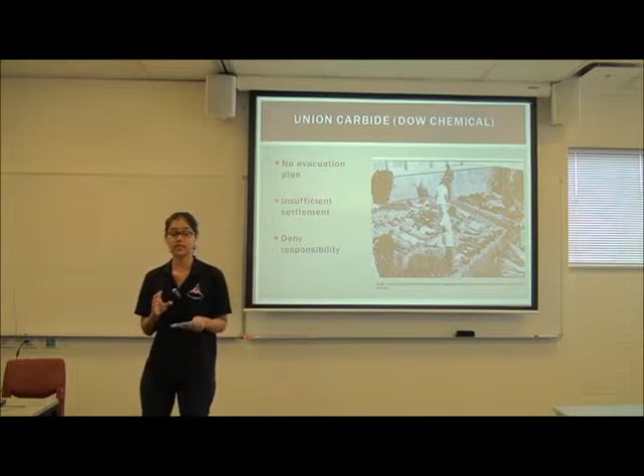No evacuation plan was prepared, and a siren used to alert the public around the factory of a chemical release only sounded for a few minutes. Most residents around the factory didn't even wake up to the siren, but instead to irritation caused by the gas. Now, Union Carbide, who owned the factory from which the toxic chemicals were released, and the company's owner, Dow Chemical, refused to clean up the factory and continue to deny responsibility for the poisoning.

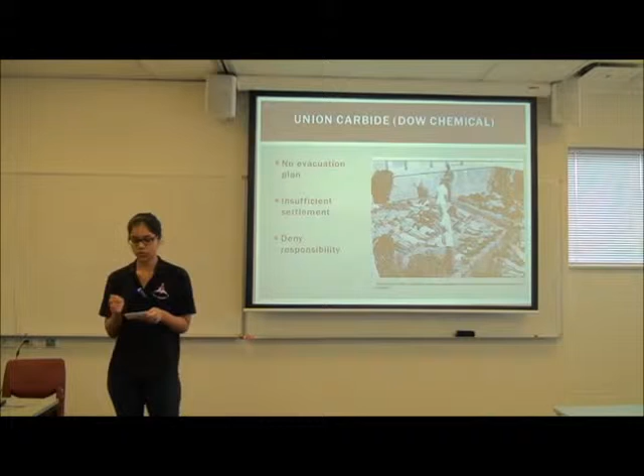Greenpeace and survivors of the accident are calling on Dow Chemical to clean up the factory site, to secure long-term medical treatment and rehabilitation for the survivors of the accident, to ensure compensation for the affected people and their families, and to provide clean drinking water to communities in areas affected by contaminated groundwater.

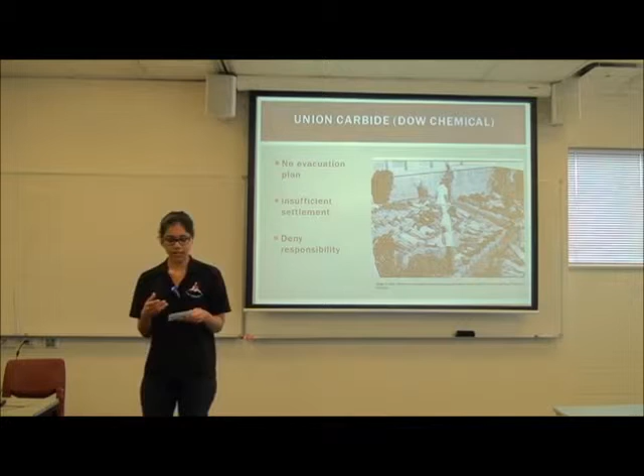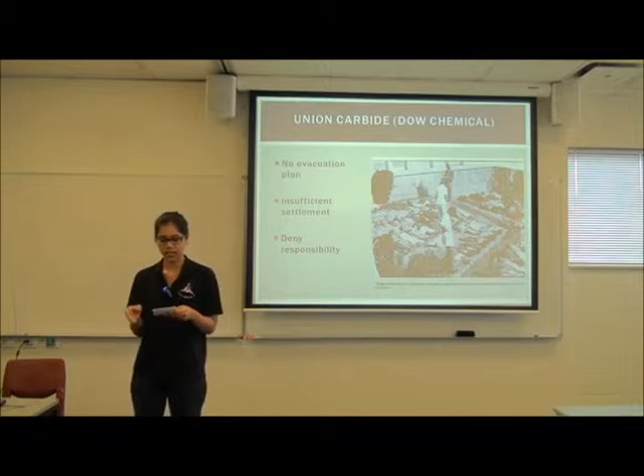Now that you have an understanding of what happened during this disaster in Bhopal, Torrin will explain how the chemical plant operated, Darren will describe what actions and events led to this horrific disaster, and Shalini will explain the technical improvements and lessons that were learned by the chemical industry as a result of the Bhopal disaster.

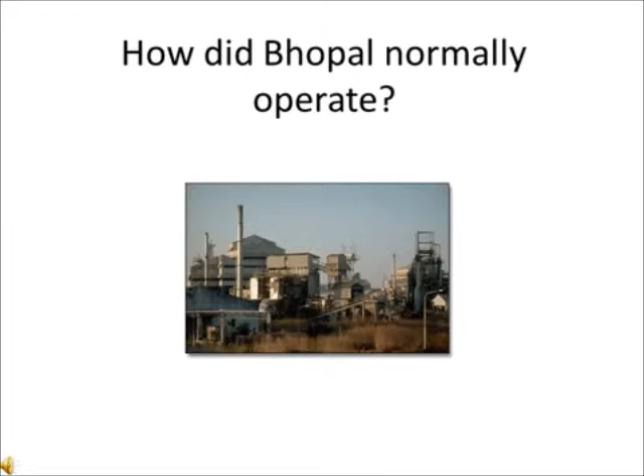The disaster at the Bhopal plant occurred because operation of the plant differed from the procedures and maintenance requirements the plant was designed for. I will briefly explain the main processes undertaken at the Bhopal plant, focusing on the methyl isocyanate storage facility, the origin of the disaster. The Union Carbide India Limited owned Bhopal plant produced the pesticide carbaryl under the trade name Sevin in Bhopal, India from 1979 until a disaster occurred in December 1984.

The plant was located approximately 2 kilometers to the north of the center of Bhopal, set amidst densely populated slums which lacked adequate emergency and technological support. Logistically, the plant's location was chosen because of its close proximity to a reliable source of water at local Bhojtal, to take advantage of the railway that would span the country, and because of its central location in India.

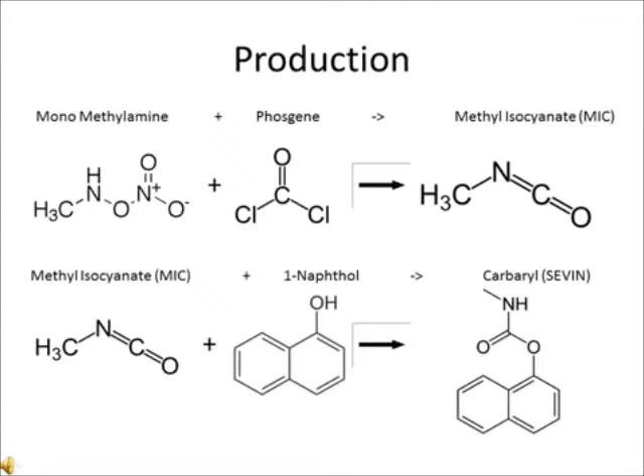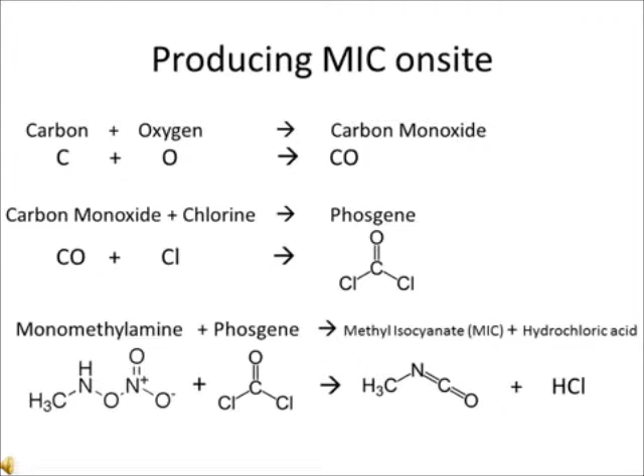Under normal operating conditions, the UCIL factory produced carbaryl by reacting monomethylamine with phosgene to produce methyl isocyanate. MIC was then reacted with alpha-naphthol to produce carbaryl. In one section of the plant, carbon and oxygen were reacted to form carbon monoxide, which was then reacted with chlorine to form phosgene. Methylamine and phosgene were then reacted in a separate part of the plant, producing unrefined MIC and hydrochloric acid as a byproduct. Once refined, the MIC entered the storage system in which the disaster occurred.

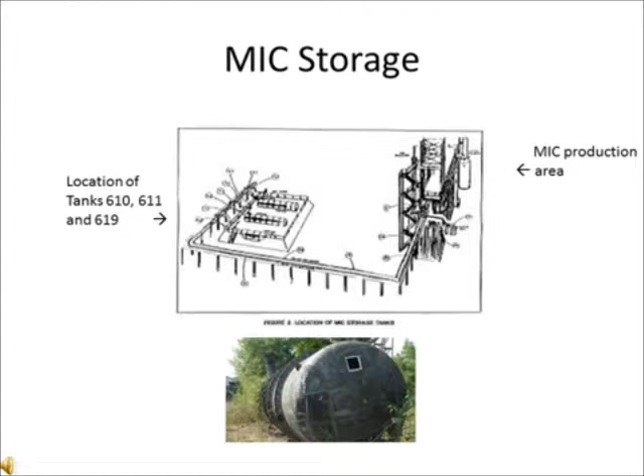The intermediate MIC was stored in 2 double-walled, partly buried stainless steel tanks, storage tanks 610 and 611. An additional storage tank, 619, was also available to receive contaminated material in case of an emergency, such as a thermal runaway reaction. These tanks were designed for an operating pressure of 4 bar and had a capacity of 55 cubic meters each.

The MIC stored in the tanks was transferred via a centrifugal pump around a loop through a fluorocarbon-based refrigeration system to keep the stored MIC near 0 degrees until it was required in the alpha-naphthol reacting vessel. MIC was introduced into this loop from the MIC refining still or from the 2 other storage tanks.

Should an overpressurization in the tank occur, a combination of a rupture disc and safety valve on the top of the tank ran to the relief valve vent header, where the gas could be discharged into the atmosphere via the vent gas scrubber and/or flare tower, described by Darren in the next section.

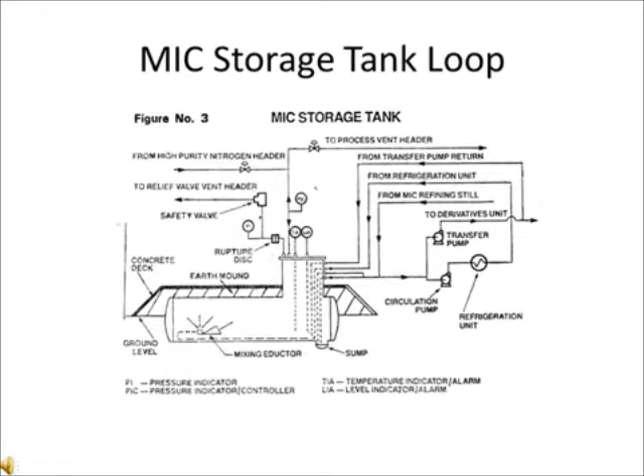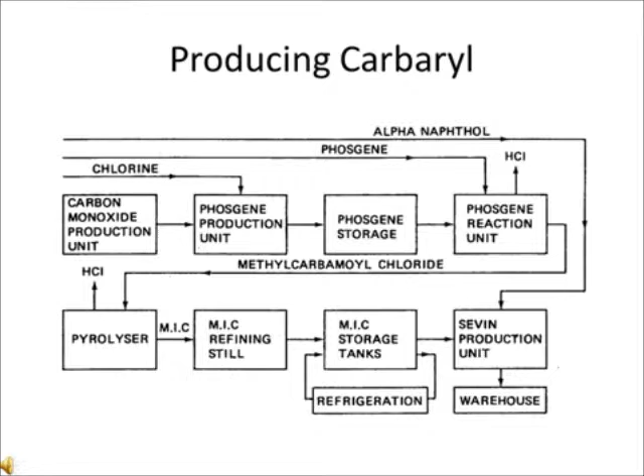Stored refined MIC was transferred to the derivatives plant when required by means of a different centrifugal pump, where it was batch reacted with alpha-naphthol to form carbaryl, ready to be packaged and dispatched.

Under normal circumstances, water was not placed in the same closed system as the stored MIC, as they react exothermically. However, due to a variety of reasons that Darren will go into next, water was introduced on the night of the disaster and culminated in a runaway exothermic reaction that could not be safely neutralized or contained.

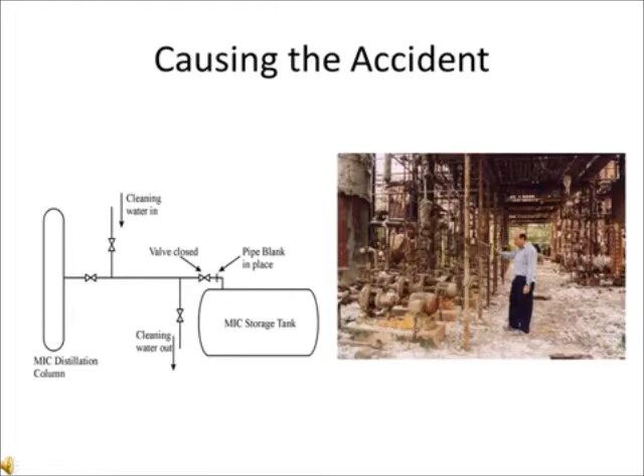Now that we've seen the consequences of what happened and how the plant operated on a daily basis, let's discuss what went wrong. Well, the list of what went wrong at Bhopal is quite long, but the basic scientific explanation is that somehow water entered a tank containing methyl isocyanate, MIC.

The water and the methyl isocyanate reacted exothermically, causing an increase in temperature and pressure. This increase was so great that the methyl isocyanate expanded into a gas form, blew past all the safety systems and was vented into the atmosphere.

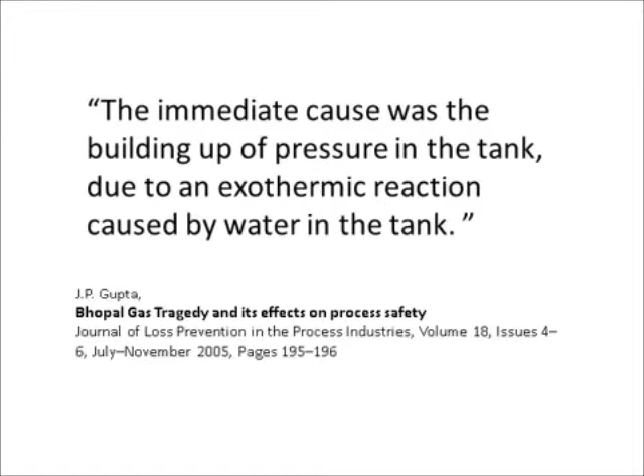There have been 3 major investigations into the incident at Bhopal. The Indian government conducted its own investigation through its Central Bureau of Investigations. This report has never been released to the public. Union Carbide conducted its own investigations, and an independent investigation was conducted by an engineering consulting firm, Arthur D.

Little. All 3 reports agree that the cause of the incident was water entering MIC storage tank 610. However, the reports disagree on how much water entered the tank and how the water entered the tank. The Union Carbide report and the Arthur D. Little investigation suggest that the only way enough water could have entered the tank would have been for it to be deliberately poured in by a disgruntled employee.

The Indian government report has never been publicly released. However, the Indian government has supported the theory that the water entered the tank when a section of pipeline was being washed. The initial investigations were hindered by the fact that large amounts of toxic chemicals remained in tanks and had to be neutralised before the investigations could take place.

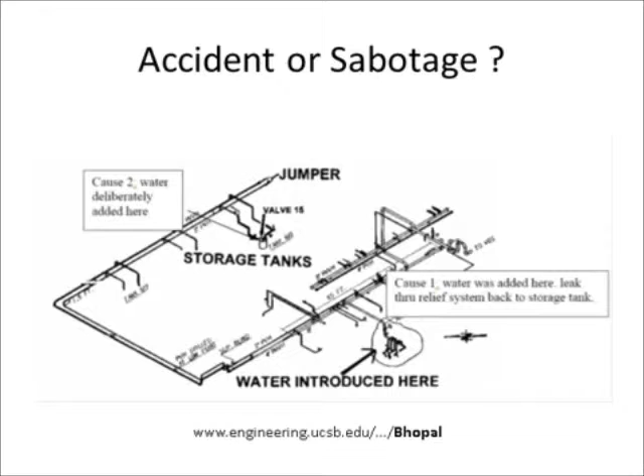However the water came to be in the tanks, the fact remains that the plant was poorly designed and located in the first instance. The plant design was compromised from the beginning, with the local government authorities insisting that the latest technology electronic warning systems be replaced by analogue gauges so that more employees would be required at the plant, thus providing more employment opportunities for local people.

The location of the plant, so near a large population centre, was also raised in Parliament. However, influential politicians with monetary stakes in the pesticide plant dismissed these concerns.

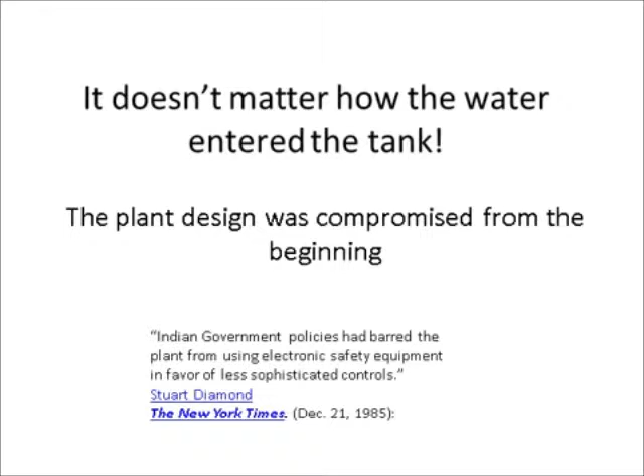The pesticide plant had been running at a loss for some time before the disaster, and many areas of the plant had been forced to cut costs. This cost cutting resulted in a reduction in staff training, a reduction in maintenance on the plant, a reduction in the amount of vital spare parts kept on site, and a reduction in personnel. Many of the plant's experienced personnel had also left the plant for better paying jobs elsewhere.

As a result, on the night of the disaster, several safety systems were not in operation. A refrigeration unit designed to keep the MIC at low temperature so that the likelihood of a runaway exothermic reaction would be reduced had been shut off. A gas scrubber that was designed to neutralise any MIC gas that escaped the tanks was shut down for maintenance, and a flare tower that could burn off escaping MIC was offline awaiting a replacement part.

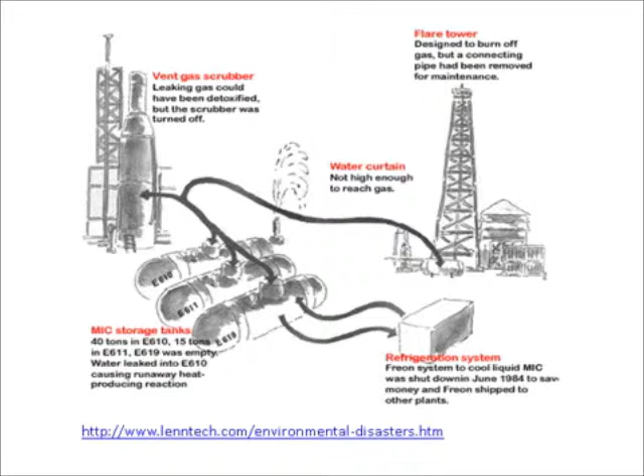A water curtain supposed to spray to the top of the flare tower was poorly designed so that the water could not reach the top of the tower. And even though the factory was located so near a large population, there were no operational warning systems and emergency management plans in place. This resulted in a chaotic response and increased the magnitude of the disaster.

The tragedy at Bhopal was not caused by a single failure of one component, but by a chain of events. There was a systematic failure in equipment, personnel and procedures. The failure started at the design process and continued through the operational phase until at the end most of the personnel were as demoralised and broken as the equipment itself. Our team will now discuss what technical improvements would have prevented the disaster and what lessons can be learnt from this tragic incident.

Now that we know what happened in the plant, how it operated normally, and the cause of the accident, let's look at some of the technical improvements and lessons learned so that a similar incident will not occur again. As Darren mentioned, the main cause of the accident was water entering the storage tanks where MIC was stored. This caused the runaway reaction, which released 40 tons of toxic gas into the atmosphere.

As mentioned earlier, the presence of water in the MIC storage tanks was due to water entering the sections of pipelines when being washed. This clearly says that minimum care was taken to clean the tanks and little or no maintenance was done on the plant. From this, it's clearly evident that the plant was operated under poor management, and management failed to conduct their regular checks to ensure safety measures were in place, which resulted in a shut-off of the refrigerator, an inoperable vent gas scrubber, an offline flare tower, and an underpowered emergency water cannon.